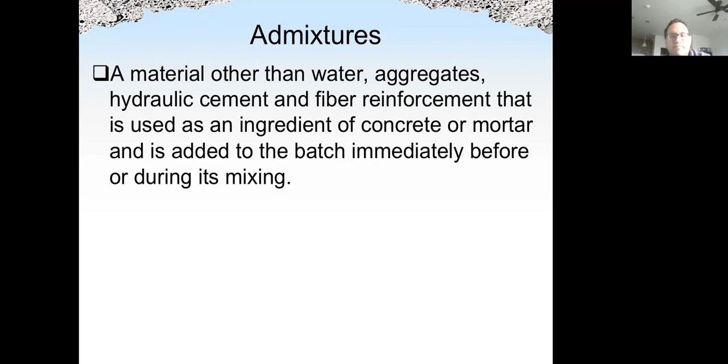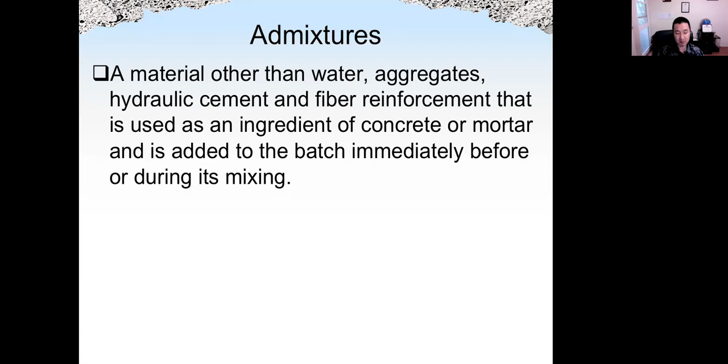Definition: materials other than water, aggregate, hydraulic cement, and fiber reinforcement that is used as ingredient of concrete or mortar and is added to the batch immediately before or during its mixing. So that is added in fresh state, before the concrete hardens we add the chemical admixtures. So within that we have mineral admixtures or cementitious materials such as fly ash, like we discussed last time, and what we're going to discuss today, which is chemical admixtures.

Chemical admixtures do not replace cement. This is one of the major differences from mineral admixtures. For mineral admixtures, for example, fly ash typically replaces 10, 20, 30, or even more percent of Portland cement. But for chemical admixtures, they do not replace cement.

Chemical admixtures may have a great effect on fresh properties. They may increase the workability of concrete, for example, or change the setting time, either increase or reduce the setting time. But this should not affect the mechanical properties of concrete significantly. That means the strength of concrete should not be affected by chemical admixtures if the other mix proportions do not change. That is also different from mineral admixtures.

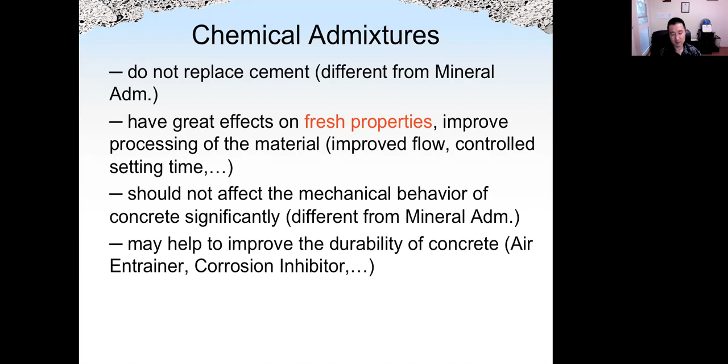There are many different types of chemical admixtures, such as air entraining agent, which entrains small, tiny air bubbles in concrete to make it more durable. We could have set controlling admixtures, or water reducing agent, sometimes also called plasticizing admixtures. Or we could have corrosion inhibiting admixtures, which reduce corrosion of steel reinforcement in concrete, shrinkage reducing admixtures, or even viscosity modifying admixtures that change the viscosity of concrete.

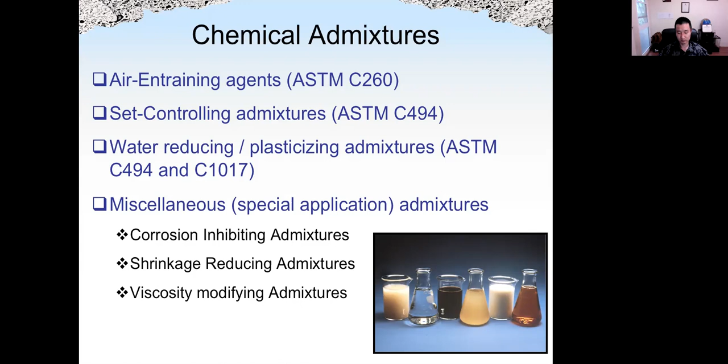This table summarizes the beneficial effect of chemical admixtures on properties of concrete. For workability, we can use water reducing agent, plasticizer, or so-called super plasticizer, which is another name for high range water reducing agent. Air entraining agent can also help the workability of concrete.

For set controlling purposes, we could have an accelerator, which reduces the setting time by increasing the chemical reaction in concrete, or a set retarding agent which slows down the hydration time, increasing the setting time of concrete.

For strength, we could have water reducing admixtures. If we use water reducing agent in concrete to reduce the water-cement ratio, then the strength of concrete could increase quite a lot.

For durability purposes, we could have air entraining agent for the concrete to resist freeze-thaw damage, sulfate attack, alkali reaction. Water reducing agent and corrosion inhibitor can sometimes also be used for durability purposes. We have different types of standards from ASTM for different types of chemical admixtures.

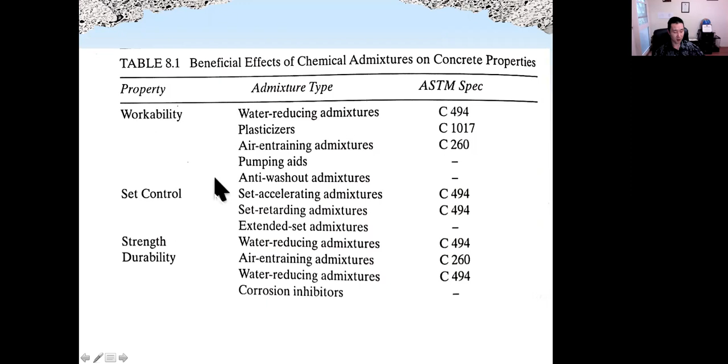For example, ASTM C494 is for set controlling and water reducing agents. They have different types depending on the function, or sometimes a combination of more than one function. For example, type D is water reducing and retarding, which increases the setting time of concrete. Type E is water reducing and accelerating, which reduces the setting time of concrete.

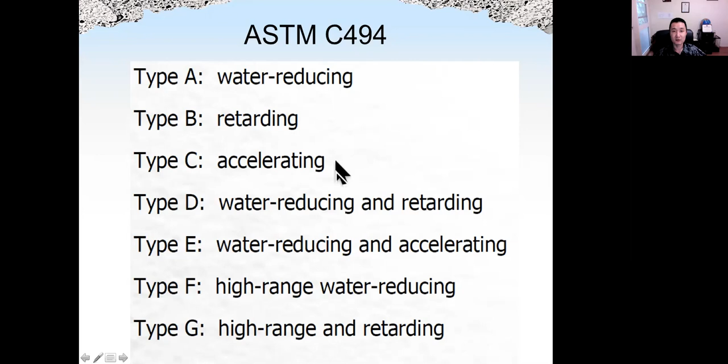Let's look at the first one we're going to discuss: air entraining agent. Air entraining agent is mainly used for freeze-thaw damage, which means the freezing and thawing of water in concrete. If not well controlled, freeze-thaw damage can cause the concrete to crack.

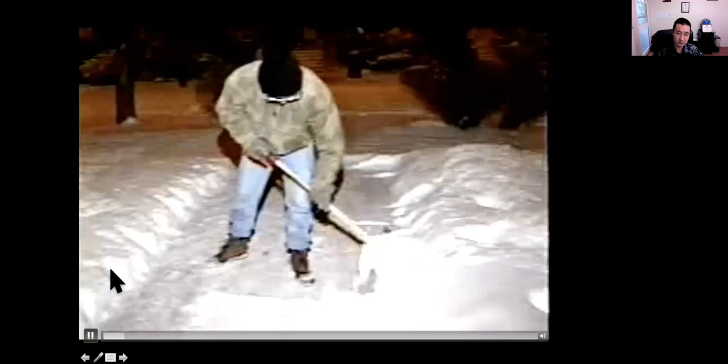Concrete in cold, wet climates undergoes many freeze-thaw cycles during the fall, winter, and spring. What happens during a freeze-thaw cycle?

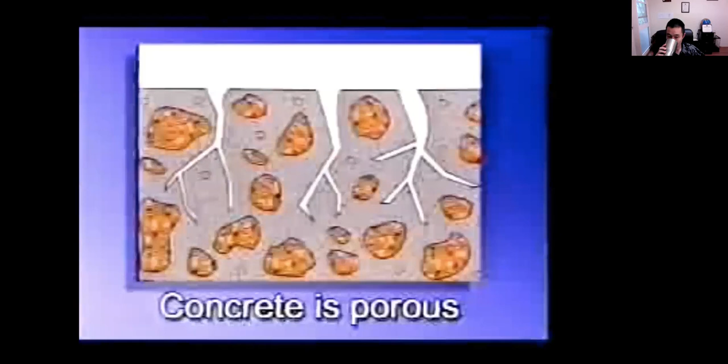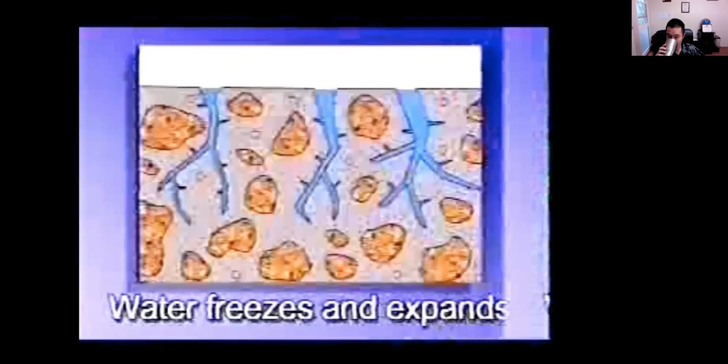No matter how low the water-cement ratio, concrete is somewhat porous. Water is able to enter the spaces and freeze. When water freezes, it expands. When there is no room for this expansion, stresses develop inside the concrete. The concrete relieves these stresses by cracking. Over many freeze-thaw cycles, these stress cracks appear as surface cracks or scaling.

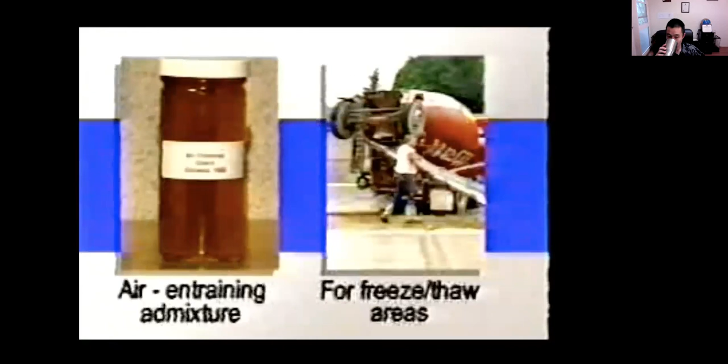For quality concrete in freeze-thaw areas, an air entraining admixture should be added to the mix. Entrained air provides millions of microscopic bubbles of stress relief when water freezes and expands.

Air entrainment is what makes this weather-exposed Chicago driveway different from the floors not exposed to the weather in this multi-story building, and even this driveway in Florida, which isn't exposed to the many freeze-thaw cycles.

So air entraining agent is mainly used to resist freeze-thaw damage, but it may also be beneficial to resist other chemical or physical attacks such as alkali reaction and sulfate attack.

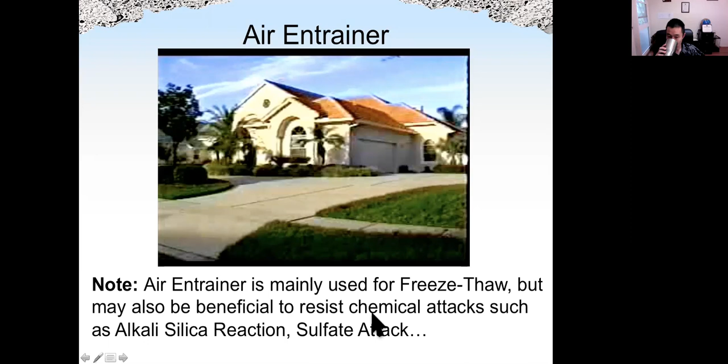Okay, then let's look at how air entraining agent works.

We know when water freezes, when water becomes ice, the volume will increase by about 9%. That increase in volume needs to find some empty space so the stress could be released. If that's not the case, the concrete may crack.

When we introduce these tiny air bubbles, shown here in these green circles, this air is empty inside, and we have water in capillary pores. The capillary pores are shown in these blue circles.

When water freezes, the increased 9% in volume will try to find some space, for example these air bubbles. If that happens, the stress will be released, so concrete will not crack. That's how air entraining agent works to reduce freeze-thaw damage.

When we reduce the water-cement ratio, the concrete permeability will be lower, which means we have less amount of capillary pores and less amount of water. So the freeze-thaw resistance of concrete will be higher.

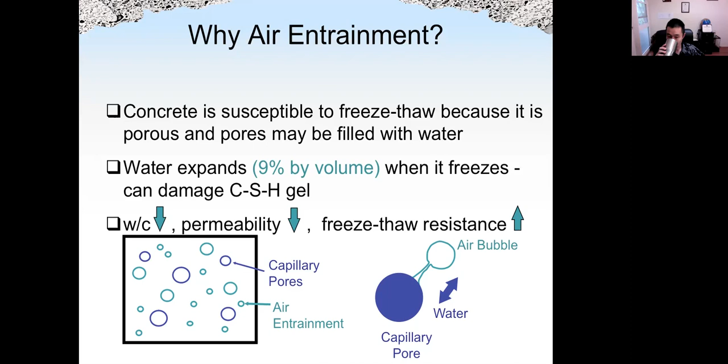When water becomes ice, the increase in volume will push either the ice or the remaining liquid. Sometimes not all the water becomes ice, so we have some remaining water in the system, and that will increase the hydraulic pressure in other places.

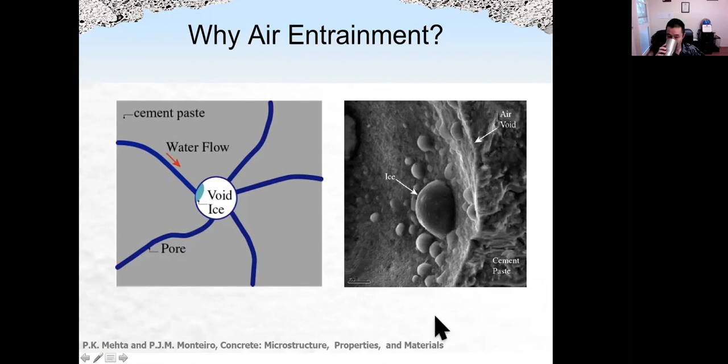When the increase in hydraulic pressure reaches this void, ice will form inside this empty air, so stress is released. That's good. As we can see here, ice formed inside this air void, and this is cement paste.

We can also see here, this is air inside cement paste after ice formation. After 5, 15, and 35 minutes, we can see clearly ice grows inside this air, so stress will be released.

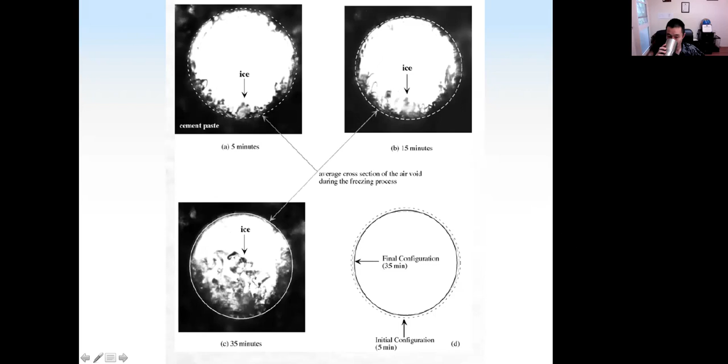Air entraining agent is typically made by organic matters such as salts of wood resins, petroleum acid, and so on. That will create and stabilize small so-called microscopic air. They can also stay in concrete for a long time. The dosage is very low.

The dosage is 0.005 to 0.05% by weight of cement, so very, very small amount compared to fly ash and other mineral admixtures.

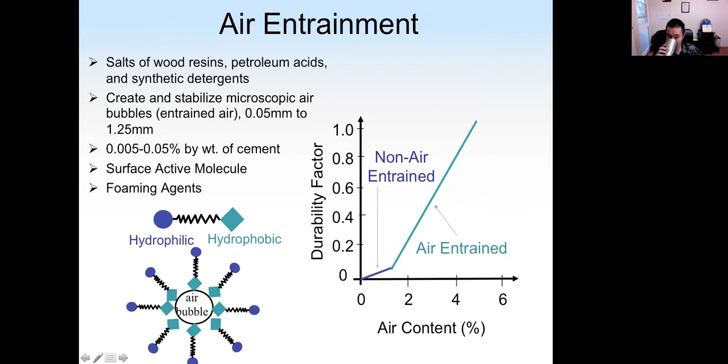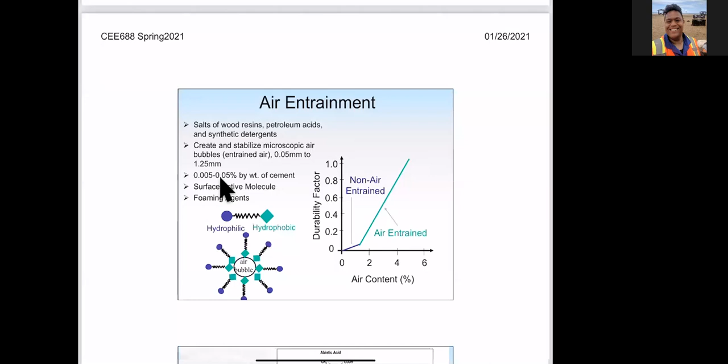I'll show you on my iPad. Okay, oh, can you see my... let's see, let me do it again. All right, so it shows it loading. Okay, how about now? It's not... oh, there it goes, okay, I see the air entraining.

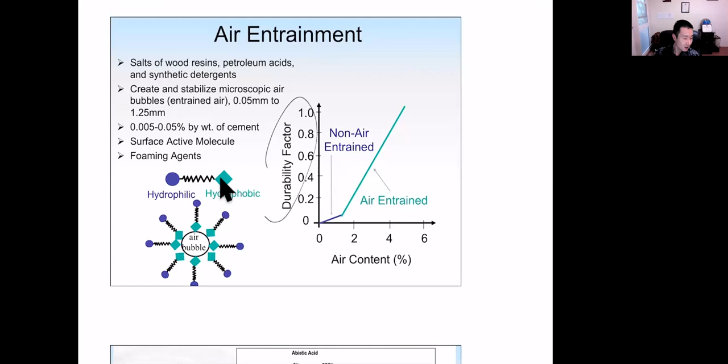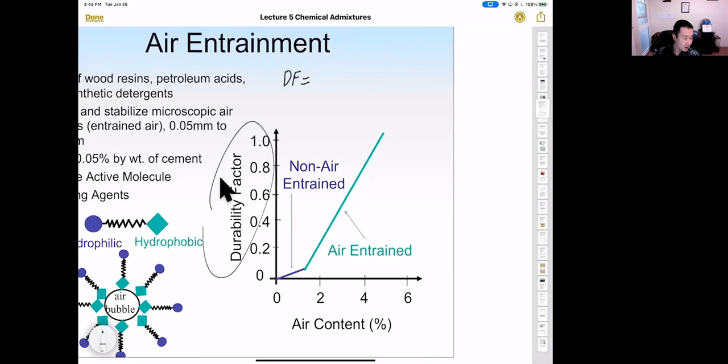Right, that's correct. Okay, so durability factor is defined as: DF, durability factor, is P times N over 300. P is the percentage of initial modulus of elasticity, which is one of the mechanical properties of concrete.

Initial dynamic modulus. N is the number of freeze-thaw cycles. So after a number of freeze-thaw cycles, we should see a reduction in modulus of elasticity of concrete.

So that is the P-value, percentage of initial dynamic modulus after N freeze-thaw cycles, and N is the freeze-thaw cycles, and 300 is the reference number of freeze-thaw cycles. The higher the durability factor, the closer the DF to 1, meaning the smaller effect of freeze-thaw cycles on mechanical property of concrete. So closer to 1, the better.

From this figure, we can see the higher the air content, the higher the durability factor. But this picture does not show the whole picture. When we increase the air content to a higher percentage, the durability factor will somehow be lower. We're going to discuss that in a moment.

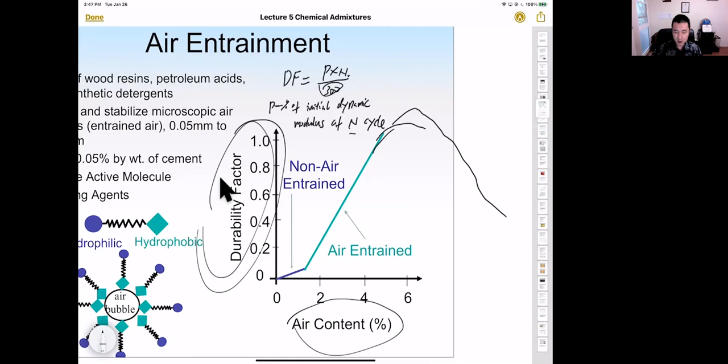So here, the next slide shows us a typical example of the molecule structure of air entraining agent. This molecule will form air, and this air can stabilize in the system, increase the resistance to freeze-thaw, and also make the concrete more workable, because this tiny air can serve as ball bearings due to its spherical shape, making the concrete easier to mix.

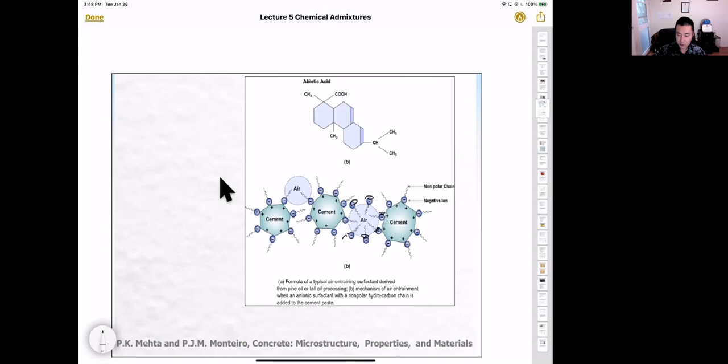Is there a disadvantage of using that air entrainment? Definitely. Very good question, which we're going to discuss right here in these slides.

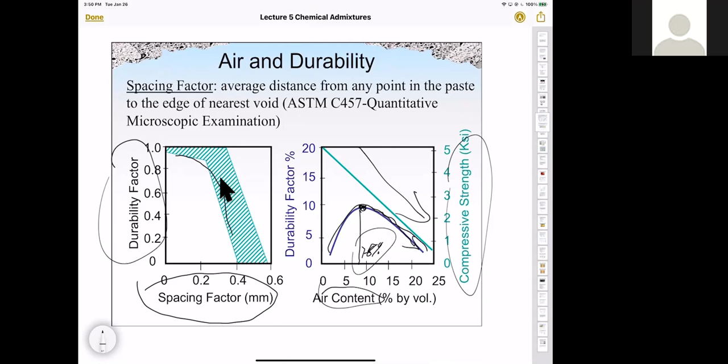Are these admixtures more expensive than the regular ones? It does make a difference in pricing, but because it's just a very small dosage, it doesn't significantly increase the cost of the materials, not too much.

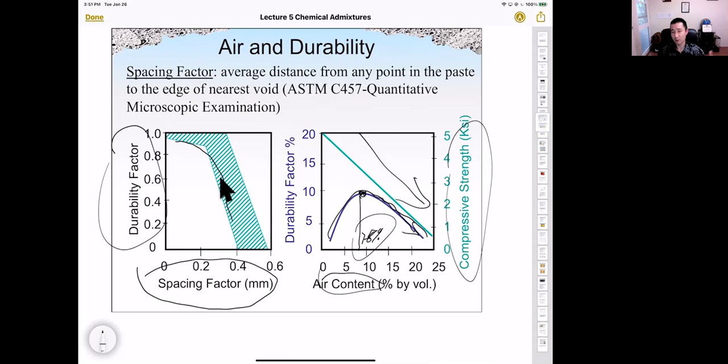In the US, the majority of the cost from concreting is the labor cost. The material is not too much, maybe 20-30% of total cost. The labor cost is the highest, and chemical admixtures take, I would say, less than 5 or 10% of the total material cost. So chemical admixtures don't cost too much.

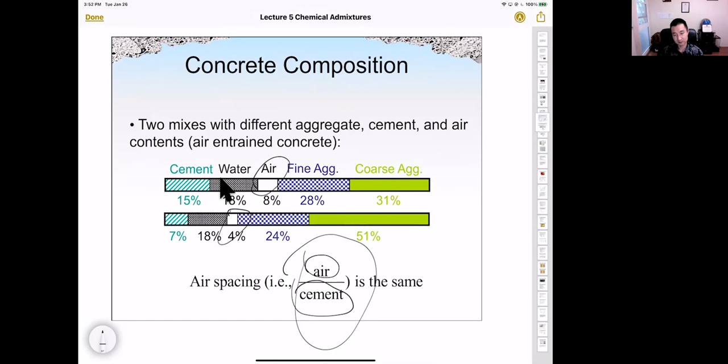I work for the Illinois Department of Transportation. Oh really, okay. I remember seeing sometimes the scaling becomes so bad underneath the bridges that they have to put boards underneath so pieces don't fall on the cars driving underneath.

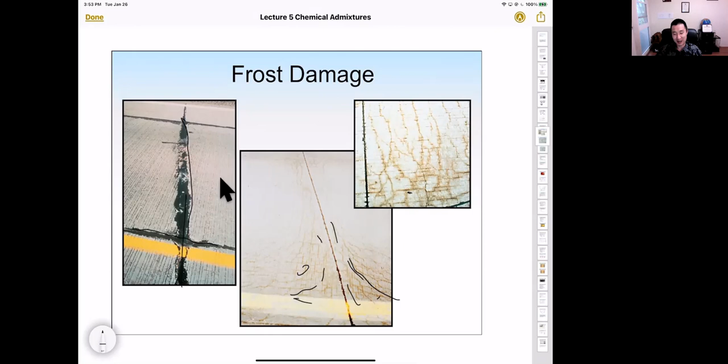When I was a graduate student, I worked for IDOT, the research project for Illinois DOT, for self-consolidating concrete and some other project, for more than five years. I've been to the field in Peoria, Urbana-Champaign area quite a lot. I was in Collinsville outside St. Louis, but I worked on I-57 and those ones too.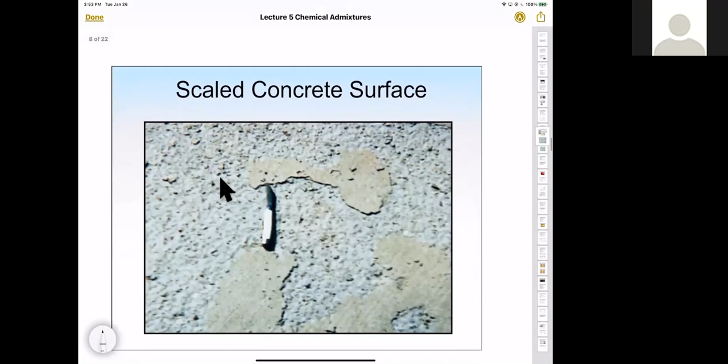This is called scaled concrete surface, which means the frost damage is only limited to the surface of concrete, as we can see from here. This is caused by the de-icing solution during the winter.

The de-icing solution is kind of salt. When we have snow on the road, we put that so the snow will melt, but that may also cause the concrete to have this surface damage. We call that scaling damage. We're going to talk about this more in the lectures on concrete durability.

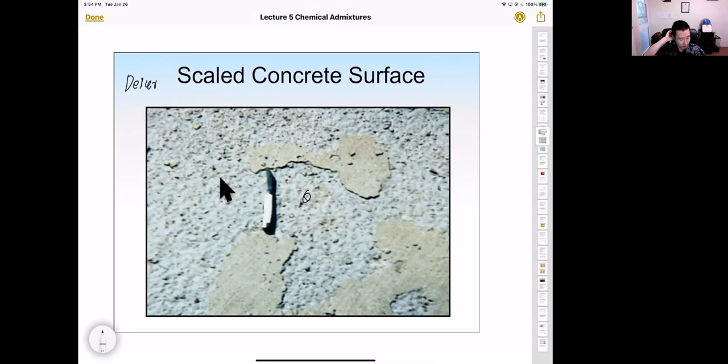Today we talk about chemical admixtures. Air entraining agent can improve durability to resist freeze-thaw damage, de-icing solution, and sulfate attack, which we discussed before, the formation of ettringite after concrete hardens. ASR, alkali silica reaction, is another type of chemical attack in concrete.

All of these physical and chemical attacks generate certain materials which expand, meaning the volume will increase. So the tiny air bubbles can release this stress from the increase in volume. That's how air entraining agent can help reduce these physical and chemical attacks.

They may also improve the workability because they behave like sand. The surface of air is smooth, circular in size, so all of this will help reduce the friction between aggregate, making the concrete more workable.

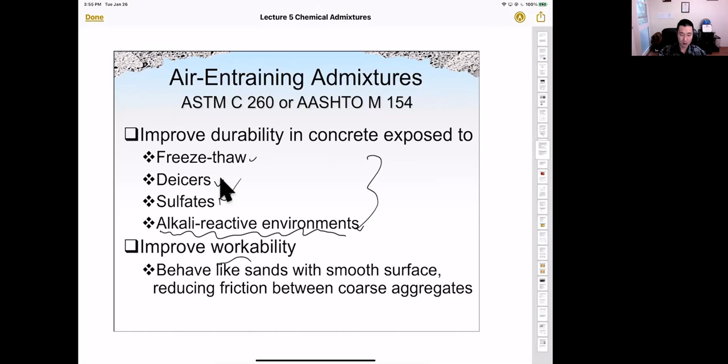But the worst thing about air entraining agent is it will reduce the strength. For every 1% of air, there's a 5% reduction in strength. That's why we have the optimum dosage of air around 7 to 8%. Too much air, and the strength will be too low.

It will also increase permeability, which means water and harmful chemicals such as chloride from seawater can penetrate the concrete and do damage more easily. So that's not good. Sometimes air entraining agent can also delay the setting time if overdosed, changing the setting time of concrete.

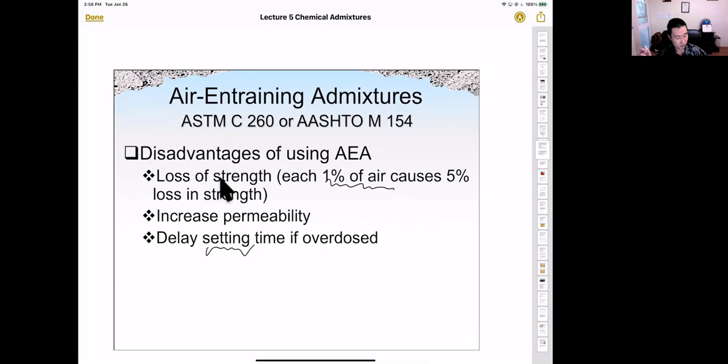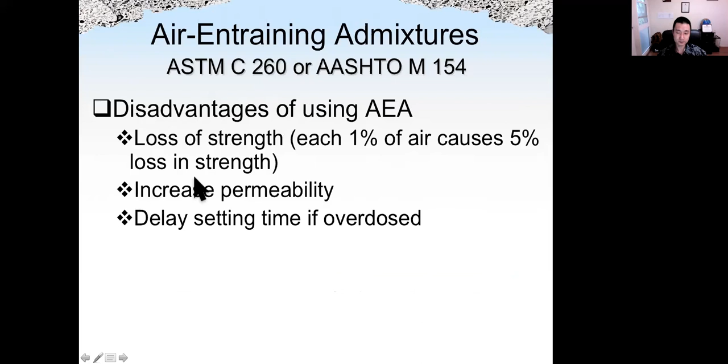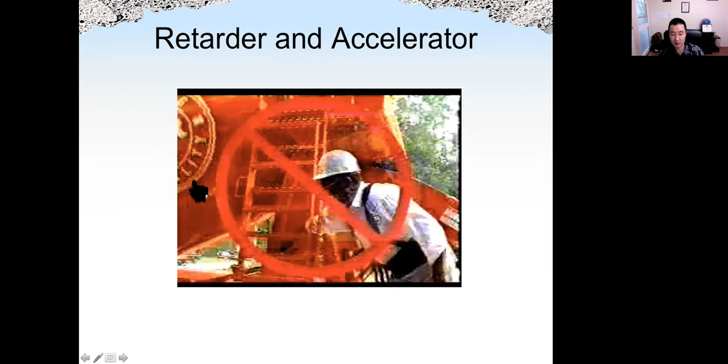The next one is set controlling admixtures. One is called retarder, which increases the setting time. The other is called accelerator, which reduces the setting time. Let's look at the video.

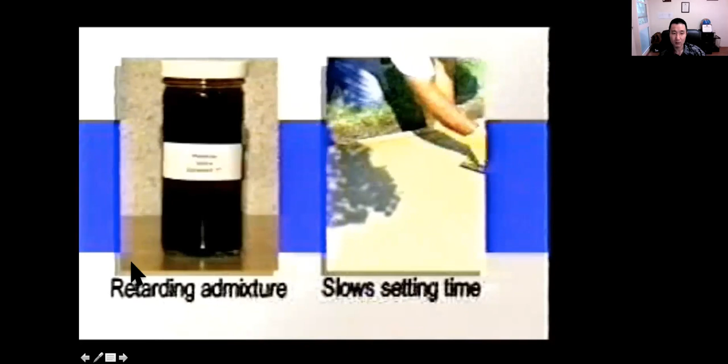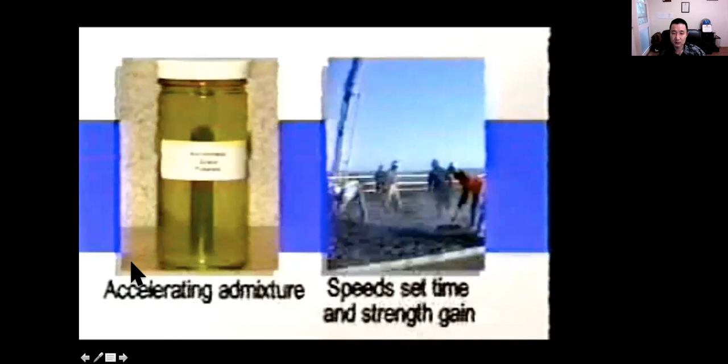To slow setting time and minimize cracking in hot weather, a retarding admixture should be added to the mix. In very cold weather, hydration and strength gain may slow or stop completely. To place concrete for this high rise in winter, an accelerating admixture may be needed to speed the concrete's set time and strength gain.

The reason is because the system needs the concentration of ions, such as calcium and hydroxide ions, to achieve a certain level, called the threshold concentration. Before the threshold concentration is reached, hydration product does not produce too much. The initial set time is when the concentration reaches that threshold, so more hydration product is produced and the concrete hardens - the hardening begins.

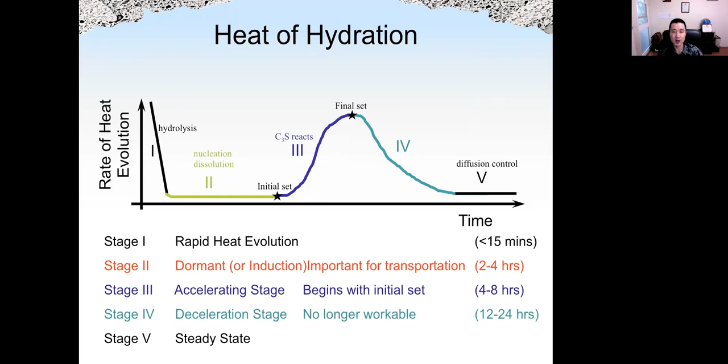For accelerator, we have two classes. The first is called quickset, used for emergency repair - the concrete will set in a few minutes. Chemicals such as sodium carbonate function to increase the reaction speed of C3A, which is one of the compounds that reacts the fastest. The hydration rate order is: number 1 is C3A, number 2 is C3S, then C4AF and C2S. So quickset increases the hydration speed of C3A, so the concrete will set in only a few minutes.

The second class is called regular accelerator. This accelerates the reaction of C3S, meaning the induction period, which is stage 2, is shortened by increasing the concentration of the ions. So the concentration reaches the threshold concentration in a shorter time, and the reaction is accelerated. It will also increase the hydration rate in stages 3 and 4.

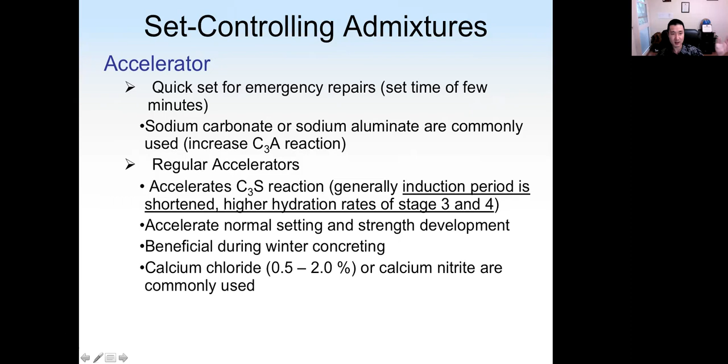Calcium chloride or calcium nitrite - these calcium salts are normally used. The reason is when we introduce calcium salt from outside the concrete, the concentration of calcium will increase rapidly. So the calcium concentration does not need the cement to be dissolved by the water. Because we add calcium from this accelerator, the time to achieve the threshold concentration is much faster. That's how this chemical works.

The types of accelerator include inorganic and organic, but all of these are calcium salts - calcium formate, calcium aluminate cement, because of the reasons we just discussed. They can accelerate the rate of hydration, reduce the setting time, and also increase the early age strength.

Calcium chloride accelerator is not used too much nowadays because chloride ions can make the steel reinforcement corrode - chloride will make steel reinforcement rust, so it cannot be used in reinforced concrete anymore. They may also increase drying shrinkage, making the concrete crack more easily. So calcium chloride does not really need to be used too much, especially for reinforced concrete.

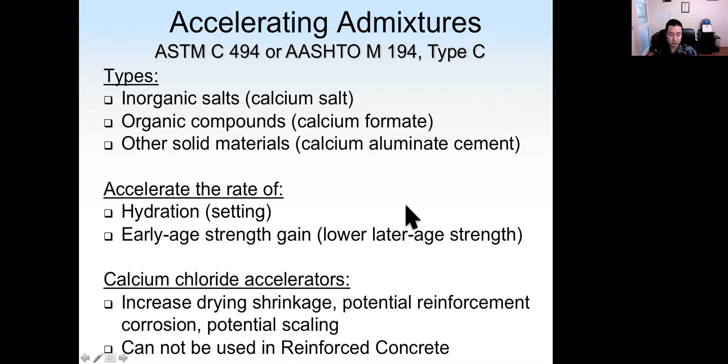This figure shows us how calcium chloride can change the setting time. This is the increased dosage of calcium chloride. The initial setting time and the final set time both reduce.

Here's another example. This is the percentage of 28-day strength as a function of percentage of calcium chloride, at different temperature. We can see when we add calcium chloride, the early age strength at 1 day, 3 day, 7 day, up to 28 days actually increases. So again, the major benefit of accelerator is to increase the early age strength.

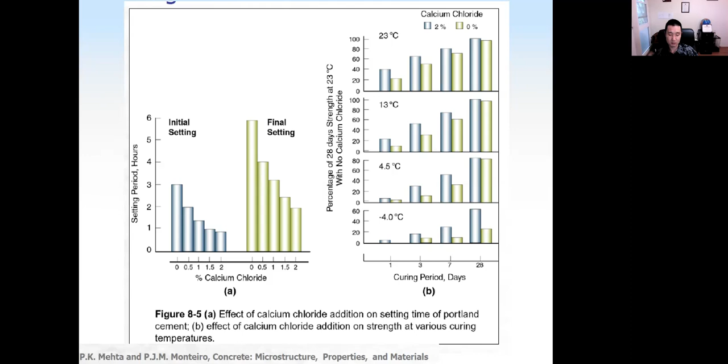So the typical application of accelerator: we can use it to expedite the start of finishing operations, reduce the time required to cure the concrete, increase the rate of early strength. So we can remove the formwork earlier, save time and labor, and have early opening for construction or service, and so on.

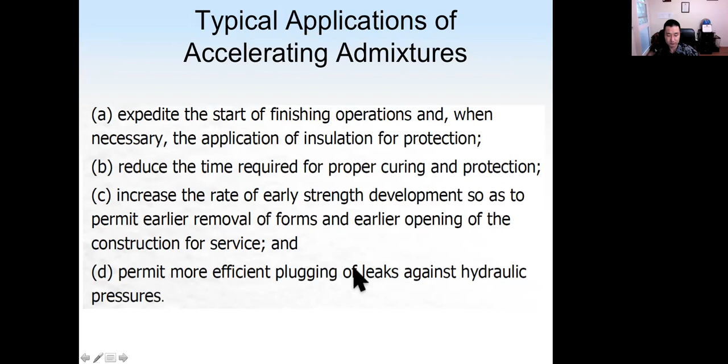For retarder, that's the opposite of accelerator. It can slow down the hydration process. Because of that, it can reduce the temperature inside the concrete. So for summer concreting, we may want to use retarder to lower the temperature, and also for mass construction if high temperature is a concern. It can also be used to extend the concrete's workable time. For example, if the concrete truck is stuck in traffic, we can use retarder to increase the setting time. It may also increase workability a little bit.

So retarder works by slowing down the C3S reaction, by increasing the second stage, the induction period. How does that work? The retarder is an organic material. It will form a coating around C3S particles, so the release of ions will be slowed down because of this coating. Organic retarders also adsorb onto nuclei of calcium hydroxide, so it will also slow down the growth of calcium hydroxide. It will also slow down the C3A reaction by adsorbing into C3A hydration products, which are ettringite and monosulfate aluminate. So they work on all three of these compounds in concrete.

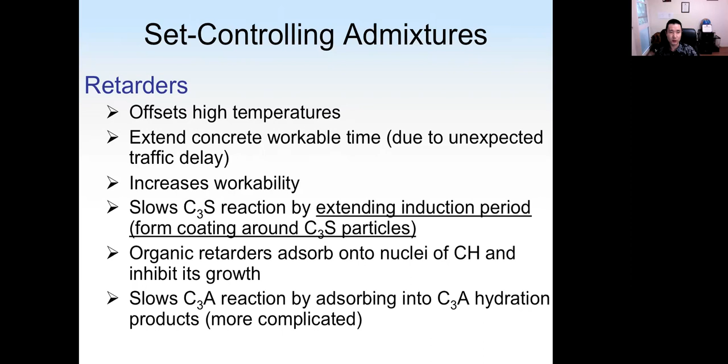Here's an example. Some people tested to see how delayed addition of retarder can change the final setting time. Delayed addition of retarder increases the effectiveness of the retarder, because less retarder is removed from solution by the hydration products of C3A.

Let's look at these figures. The x-axis shows the delay time, meaning how many minutes we delay after we mix the raw materials - cement with aggregate and water. For example, this is a 10 minute delay of retarder addition. The final setting time will be much higher compared to 0 minutes delay.

Why does only a 10 minute delay increase the setting time by that much? The reason is shown here. Initially we mix water with cement, and there's a lot going on from hydration of C3A because C3A reacts super fast. So if we do not add retarder at the beginning, we let C3A react first. But after 10 minutes, we add retarder, which makes the retarder more available to work on C3S hydration. That's why only a 10 minute delay gives us much more effectiveness on the final setting time.

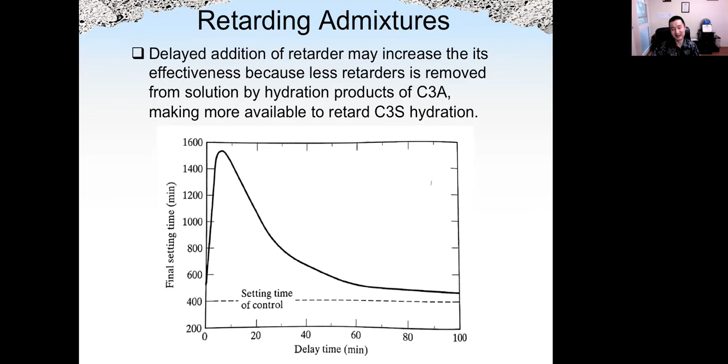We use retarder in cases such as traffic delay, if the temperature is too high and we need to slow down the hydration, or if we have difficulties placing the concrete and need extra time. Or we try to control the setting of a large structure unit, trying to eliminate so-called cold joints. Cold joint means when we have a very large formwork, and one truck of concrete can only fill a certain part of that formwork.

We do not want the first truck concrete to set before we pour the second truck. If that's the case, we call that a cold joint. So we want concrete to set as one big chunk. In that case, we may also increase the setting time of concrete, or for a special finishing process, increase the setting time. All right, so that's the retarder.

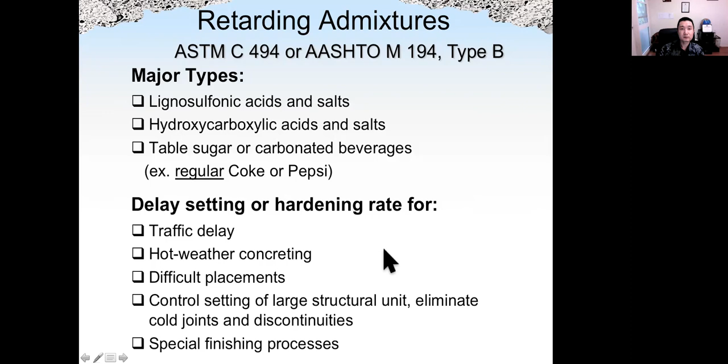The next one is water reducing agent, superplasticizer. These materials can make the concrete more workable, or if we do not change the workability, we can reduce the water cement ratio. In that way we can increase the strength of concrete. So let's look at water reducing agent.

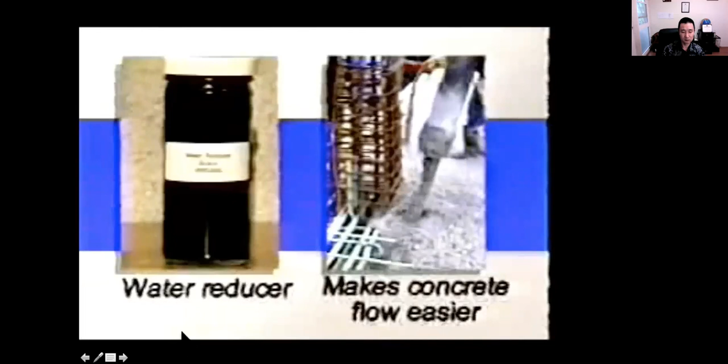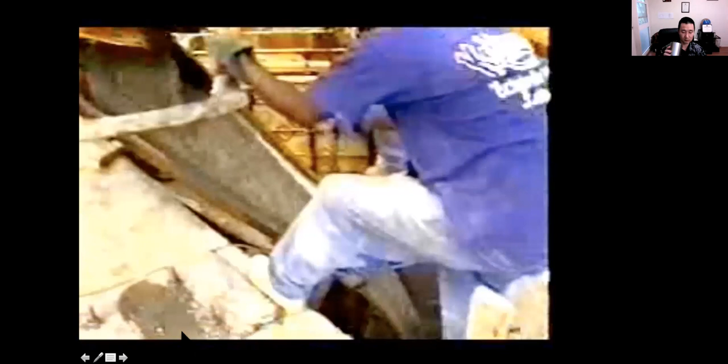Chemical admixtures give concrete properties it normally wouldn't have. To make a mix more fluid, a water reducer can be added. Water reducers make the concrete flow easier from the pump, through the hose, to the elevated slab in this warehouse, without increasing the water content. If a water reducer is not used, pump hoses can become clogged and blocked, delaying the placement of concrete. Water reducers are also used for concrete in areas that are difficult to place, such as around congested reinforcing steel.

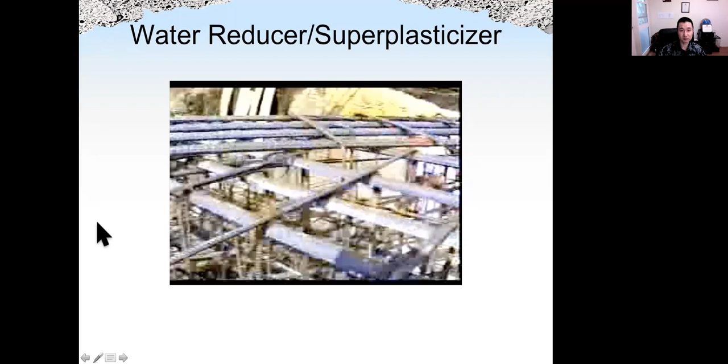So water reducing agent has basically two functions. One is to reduce the water content. If we do not want to increase workability, so we want to keep the slump the same, we can reduce the water content by a certain percentage. In that way we can increase the strength of concrete.

Or we use it to increase the workability and keep the same water to cement ratio, meaning we do not change the water cement ratio, but by adding these chemicals we increase the slump. In that case we call that plasticizer. Most water reducing agents are organic matter, as we can see here.

How does this water reducing agent work? This shows one of the functions. The molecule of the water reducing agent can neutralize the surface charge of cement particles. Before adding water reducing agent, the surface charge of cement particles could be positive or negative, and positive or negative charges will attract each other. Water reducing agent will neutralize the surface charge, making them all negative charge, so they will repel each other. That's one function of why it can reduce the water requirement.

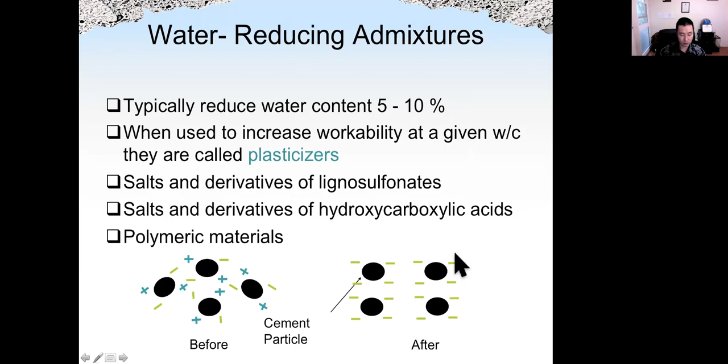Here shows some examples of the molecule structure of water reducing agent. Again, most of them are organic matter.

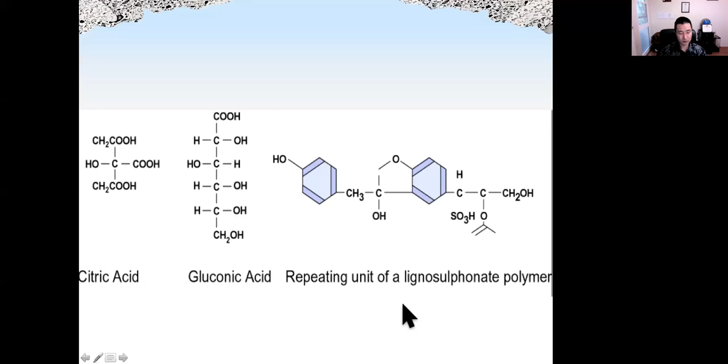We also have a so-called high-range water reducer. They can reduce the water content by 12 to 30%. For high-strength concrete or self-consolidating concrete, if we want very high strength by lowering the water to cement ratio, or we want to increase the slump to an extreme extent, then we want to use superplasticizer.

Typically 1 to 3% by weight of cement. We have different types of superplasticizer. Again, they are all polymeric materials, such as this one called sulfonated melamine formaldehyde, or SMF. Another one is SNF. The newest one is called PC type, or polycarboxylated type. So very hard to pronounce, but this PC type is the newest type of superplasticizer.

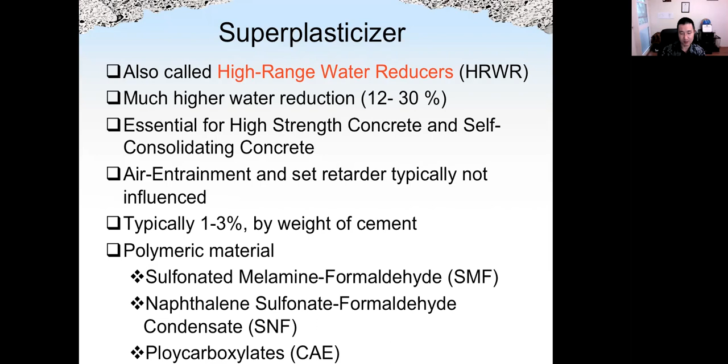So one of the functions of water reducing agent is working by neutralizing the surface charge. But there's another mode of action. One of them is called physical binding and dispersion.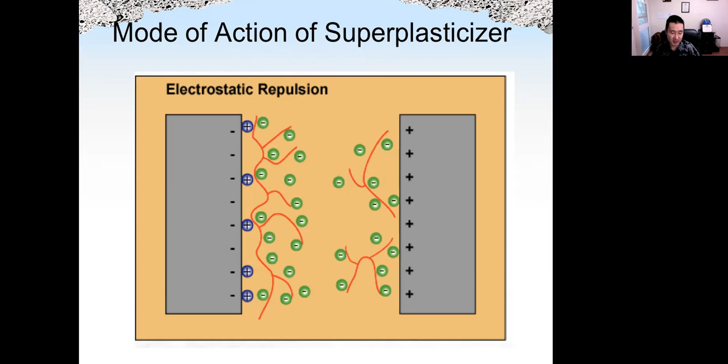The third mode of action is called steric repulsion. This is due to the bulky nature of these organic molecules. The organic molecule has long arms, so they wrap around the particles, and this long arm will prevent the cement particles from sticking to each other. So we call that steric repulsion.

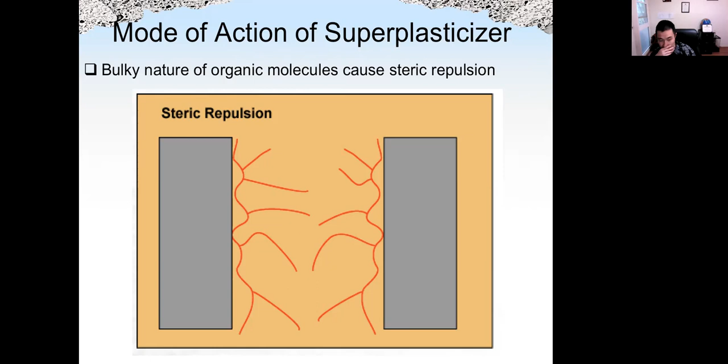Water reducing agent can not only work on cement, but other types of minerals can also be well dispersed using these chemicals. This is a type of mineral paste. When we add 10 more percent of water, it becomes well dispersed. But this is only 0.1% by weight of the paste using a water reducing agent, and we can see even more dispersion compared with 10% more water.

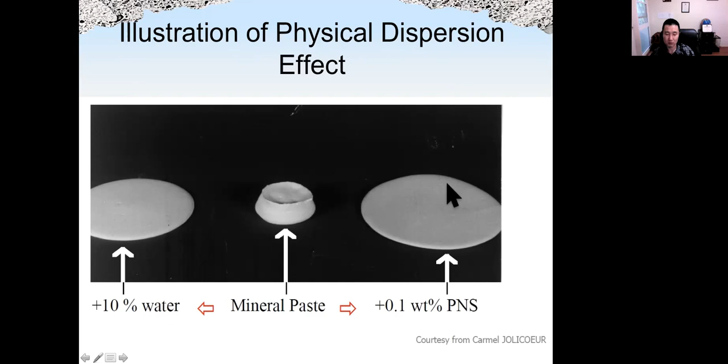Water reducing agent is specified in ASTM C494. We have many different types: low range, high range, and one or two functions. Type A is normal, low range. Type D is water reducing plus retarding, which means the setting time will be increased, or accelerating, which reduces the setting time. So depending on what you want for your concrete, you can choose different types of water reducer.

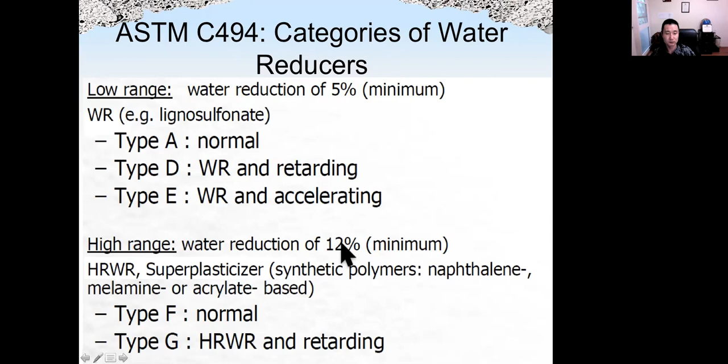We can use water reducer to either increase the consistency, meaning how easy the concrete can flow, and increase the slump. Or we can use it to achieve higher strength by reducing the water to cement ratio. We can also use it to reduce how much cement is used in concrete, because we can use less cement to maintain the same slump. So we save the cement, save the cost, and save the environment. But not all three benefits can be obtained at the same time. We can either increase the slump, increase the strength, or reduce the cement, but typically cannot get all three benefits at the same time.

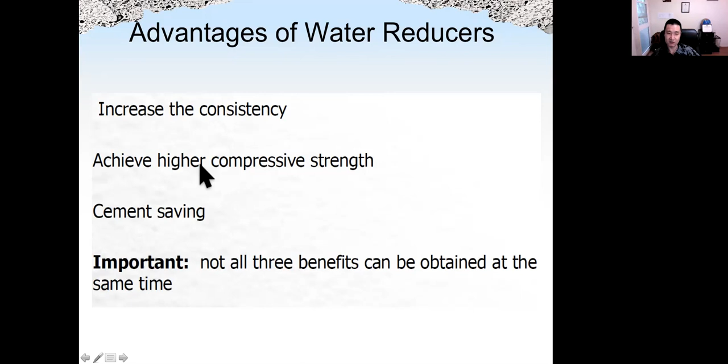Here we see the options for water reducing applications. The X axis is the water content, and the Y axis is the slump flow. If we keep the water content constant and add superplasticizer, the workability will be higher. But if we keep the slump constant, we can reduce the amount of water, so we use a lower water cement ratio and the strength will be higher. We can also use less amount of cement.

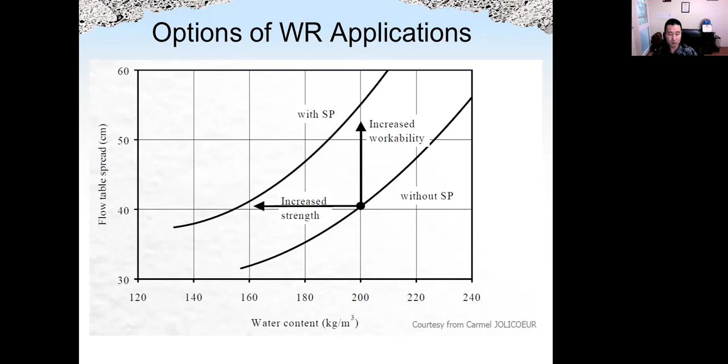This figure compares concrete with different types of superplasticizer. C is for control, the red line, which has no superplasticizer. N, M, and X are concrete with different types of superplasticizer. We can see the strength does not change significantly depending on the type of superplasticizer used, meaning we did not change the water cement ratio. But if we use this to reduce the water cement ratio, we're going to see a lot of increase in strength.

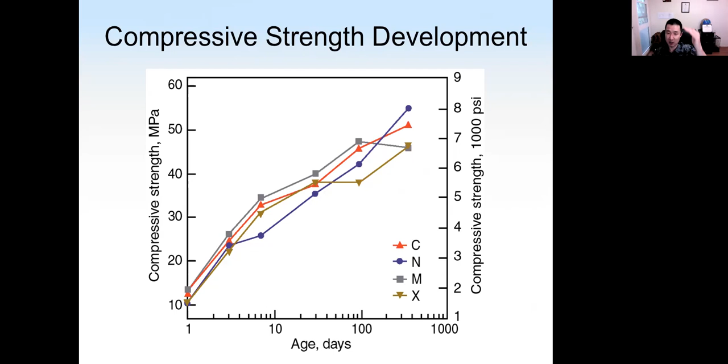Besides reducing the water cement ratio, a well dispersed and more homogeneous concrete can actually improve the cement efficiency and reduce the entrapped air, the big air bubbles in concrete which can significantly reduce the strength. That function itself can increase the strength up to 25%, without changing the water cement ratio. By adding these chemicals, we can make the concrete more homogeneous, giving it higher strength. Remember, superplasticizer is essential - it's a must for high strength concrete.

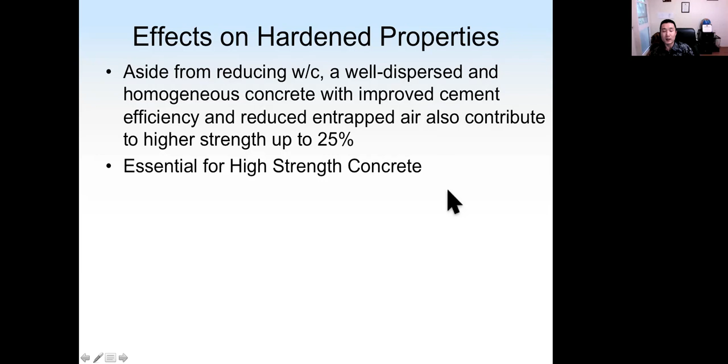That's the major type of chemicals we discussed. Corrosion inhibitors, by its name, we know can reduce the corrosion potential for reinforcement, which is steel rebar. We have different types depending on how they work: anodic inhibitor, cathodic inhibitor, and mixed inhibitor.

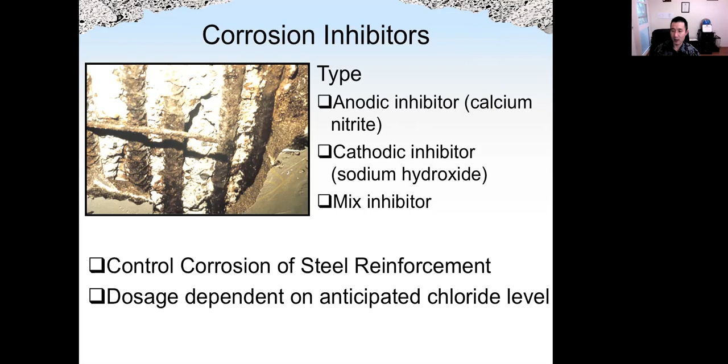We'll talk about this more when we discuss corrosion of concrete in one of the concrete durability lectures. Corrosion inhibitor can control the corrosion of steel reinforcement, and the dosage depends on how much chloride level you anticipate from the concrete. For example, if the concrete will be exposed to seawater, you will expect more chloride concentration in the concrete. Here we show different types of corrosion inhibitors, example chemicals, typical dosage, and how they will work on the concrete.

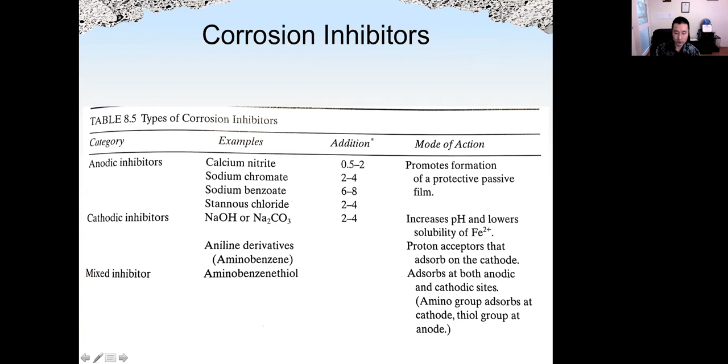The last one we're going to discuss today is shrinkage reducing admixture. Shrinkage is a very important potential problem for concrete, and we have a lecture on shrinkage itself. Shrinkage reducing admixtures, by its name, reduce the amount of shrinkage by reducing the surface tension of the pore solution - the pore solution being the water inside the concrete. We'll talk about this more when we discuss shrinkage of concrete, but today we know we have chemicals which can help reduce the drying shrinkage of concrete, and these are called shrinkage reducing admixtures.

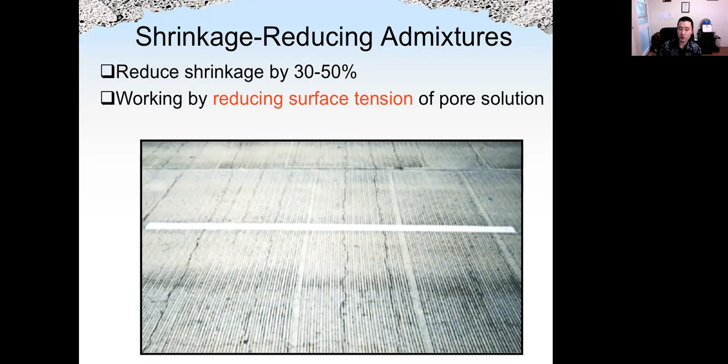Today we discussed several types of chemical admixtures. We should know the difference between chemical and mineral admixtures, and how, for example, water reducing agents work, how set controlling admixtures work, and how air entraining agents work. That's the end for today's lecture.